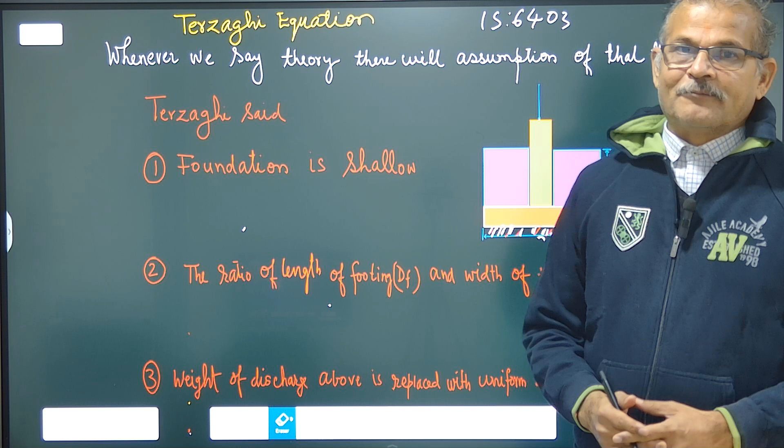Determination of safe bearing capacity based upon the Prandtl theory. So Terzaghi assumed that depth of footing

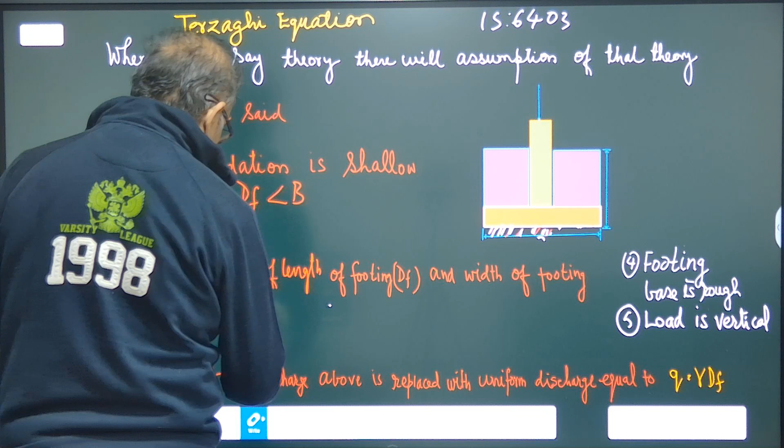is less than width of footing. He also assumed that length to width of footing ratio is greater than 5. Load transfer from the structure is vertical.

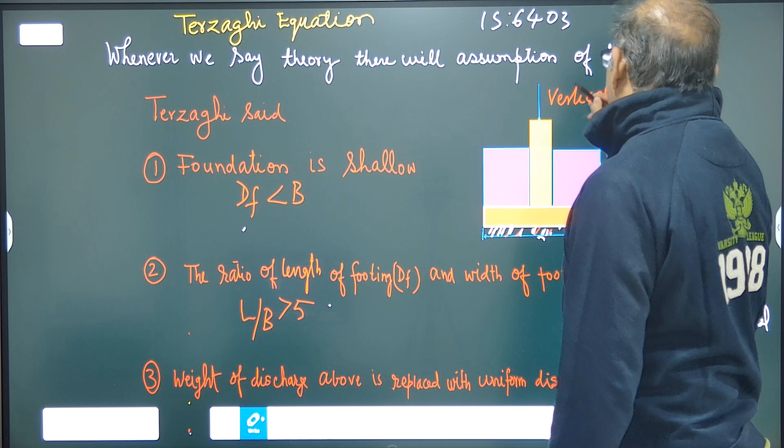So load coming from the structure is vertical, and base of footing is rough. In case of failure, it follows the general shear failure.

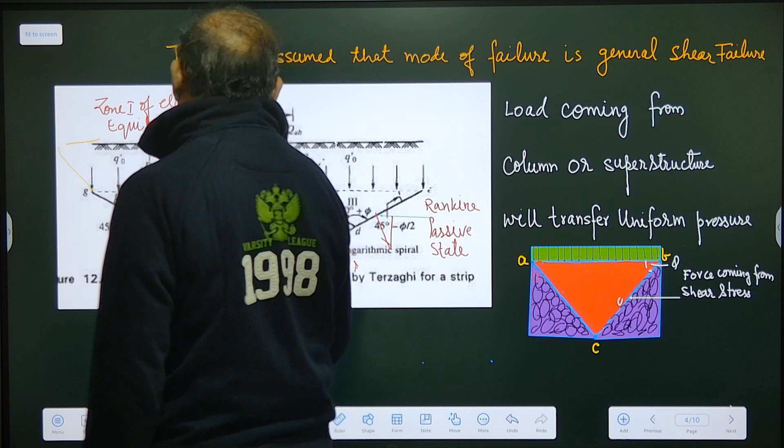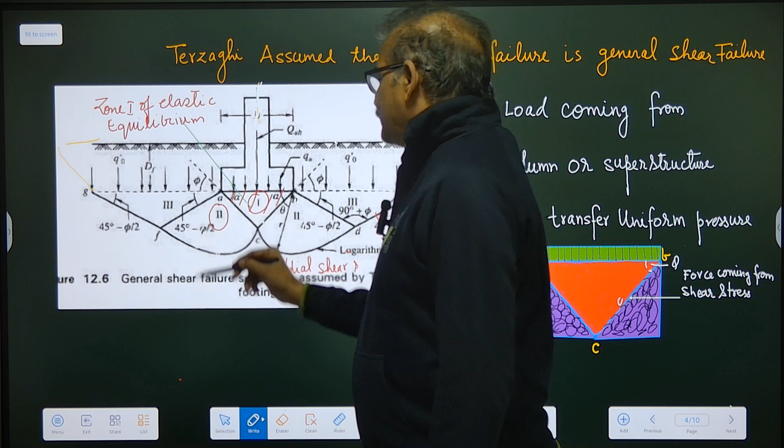There will be 5 zones. First zone will be the zone of elastic equilibrium. It will sink along with the footing, and zone 2 on either side will be radial shear failure zone,

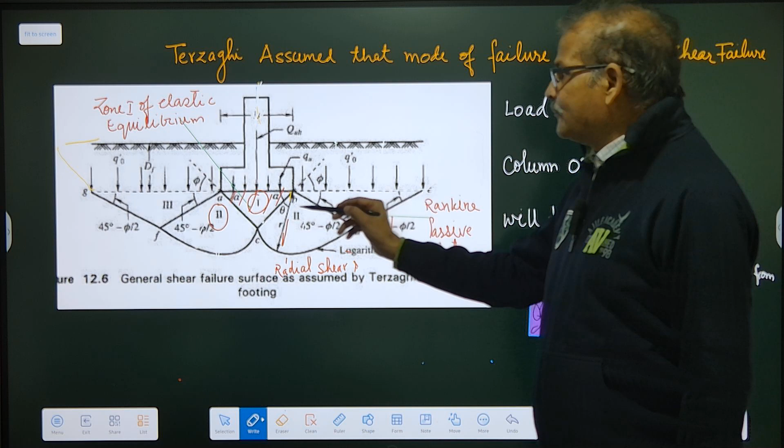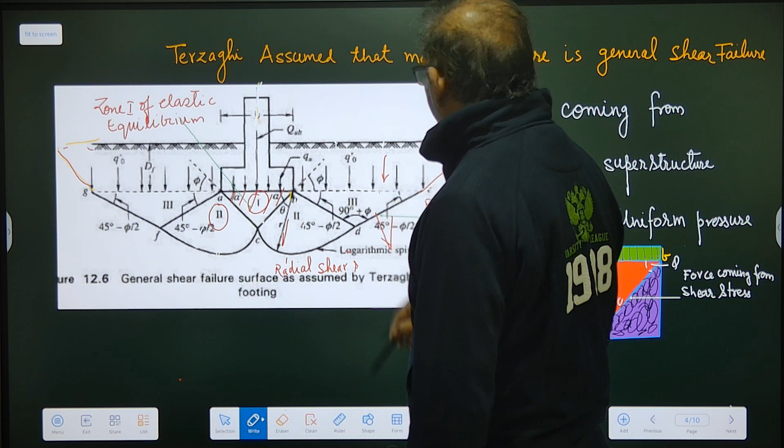which will have logarithmic spiral of radius r from the corner of the footing, and third will be the Rankine passive zone. This failure will not extend to the surface, and the shear strength of soil above this horizontal surface has not been considered for the analysis of safe bearing capacity by Terzaghi.

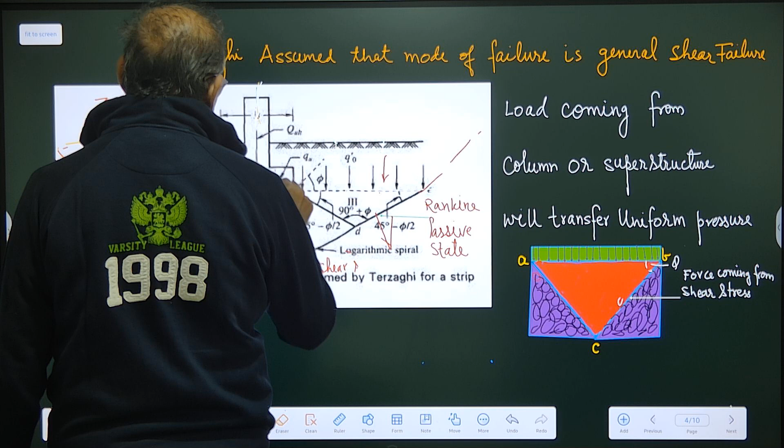And the load coming from the structure will be uniform. It will be uniformly distributed over this horizontal surface. These are all the assumptions he has made while deriving his theory.

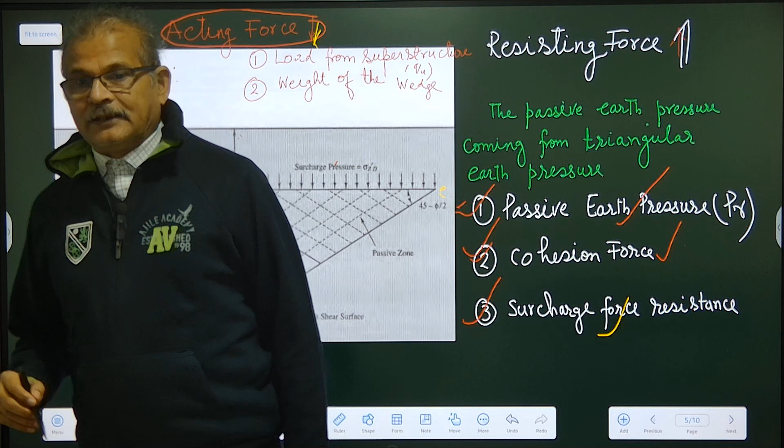There will be two forces acting downward responsible for the sinking of the footing, and there will be four forces acting upward responsible for holding or preventing the falling of this footing.

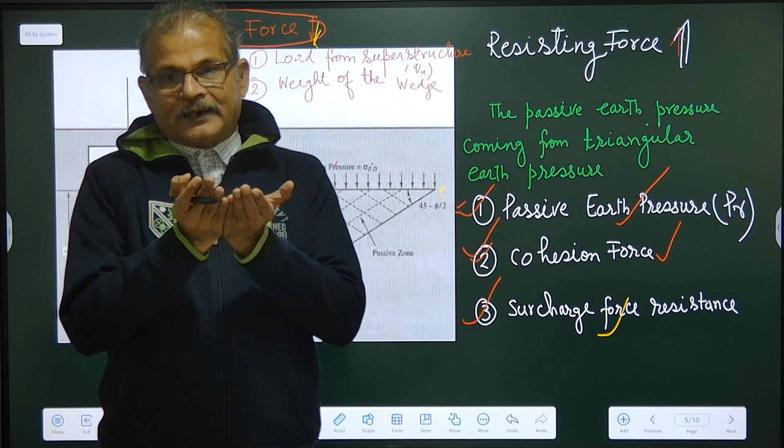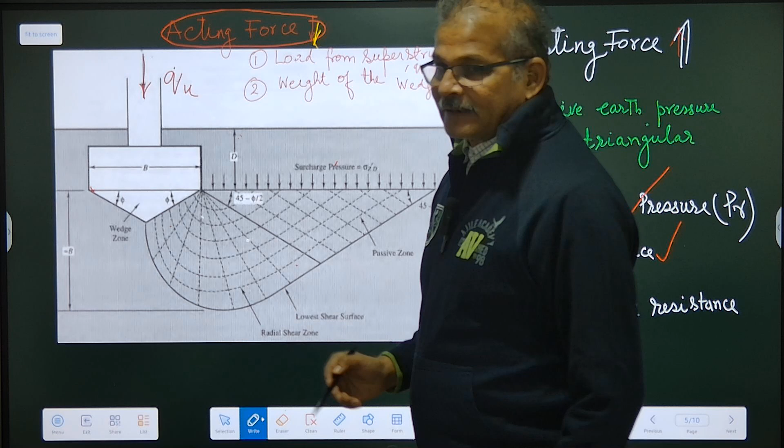So this is the two force: the load coming from the structure, that is QU, at the state of equilibrium. It will be in the plastic equilibrium. This soil will be in the plastic equilibrium, and weight of this wedge.

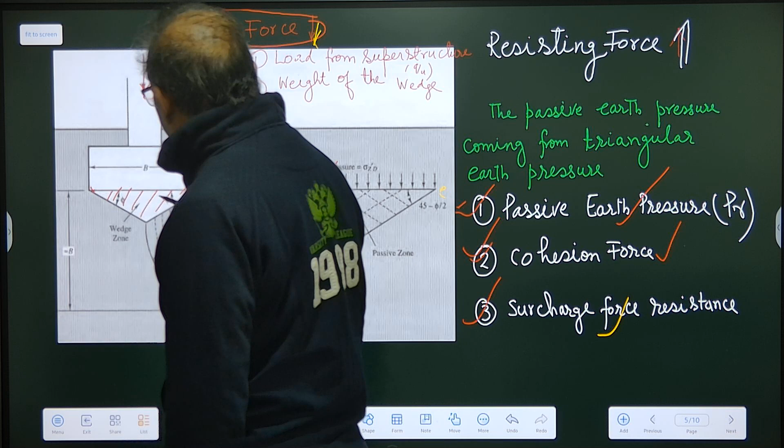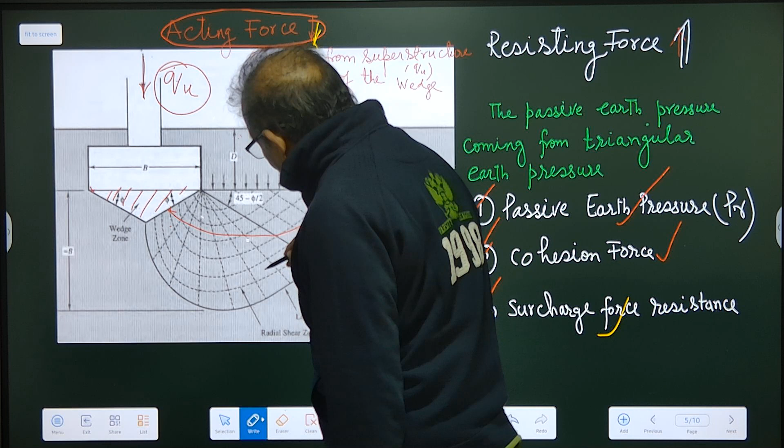Load coming from the superstructure and weight of the wedge will be responsible for sinking the footing, and the passive pressure from the soil, because once it sinks, it will have passive pressure over the soil.

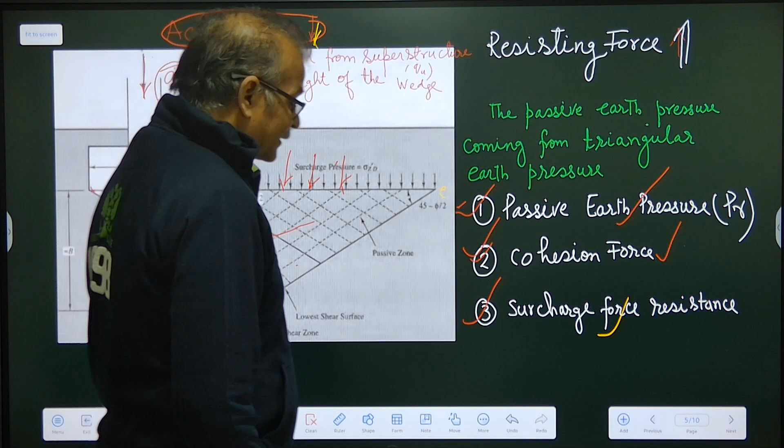So passive pressure from the soil, cohesion force, and surcharge weight will all be responsible for holding the footing in equilibrium state, and the shear force acting over this plane face will also be responsible.

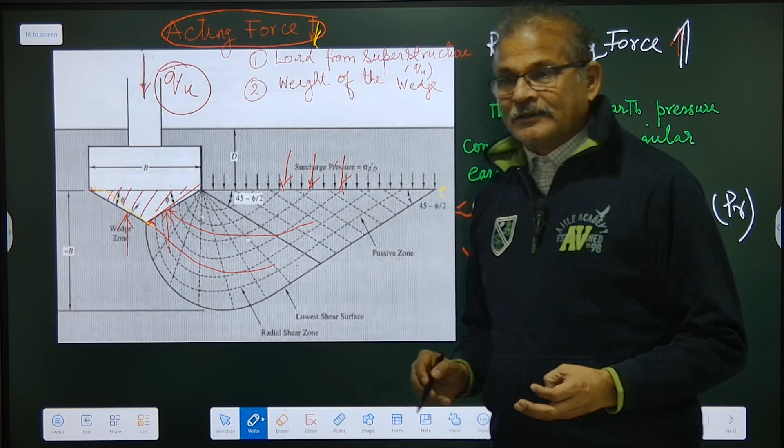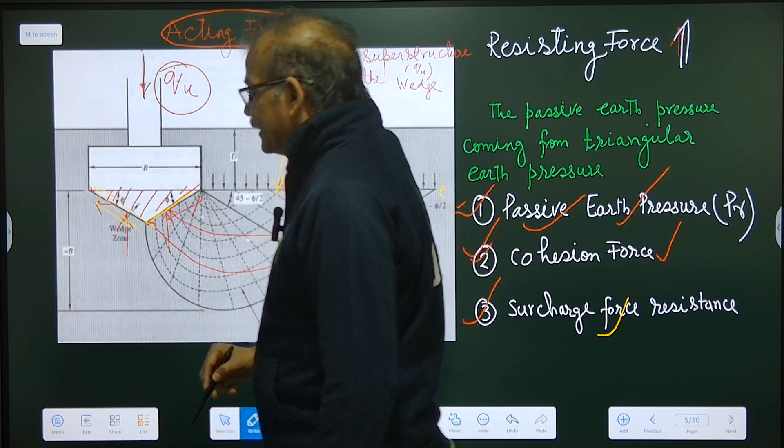So lateral earth force, this is passive earth pressure from the soil, cohesion force, surcharge force, and the shear force acting at this face due to C and phi will all be responsible for holding the footing in equilibrium state.

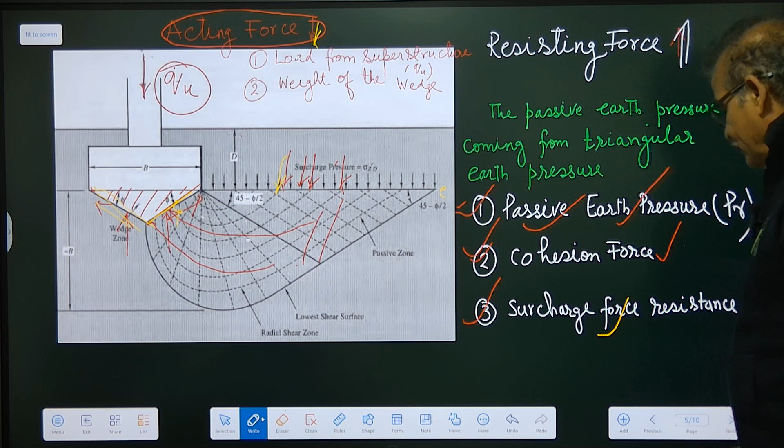As for the earth pressure, it will have passive behavior, so it follows the Rankine earth pressure theory. In Rankine earth pressure theory, it is explained that whenever this retaining wall face is moving inside, there will be pressure from the earth onto the retaining wall.

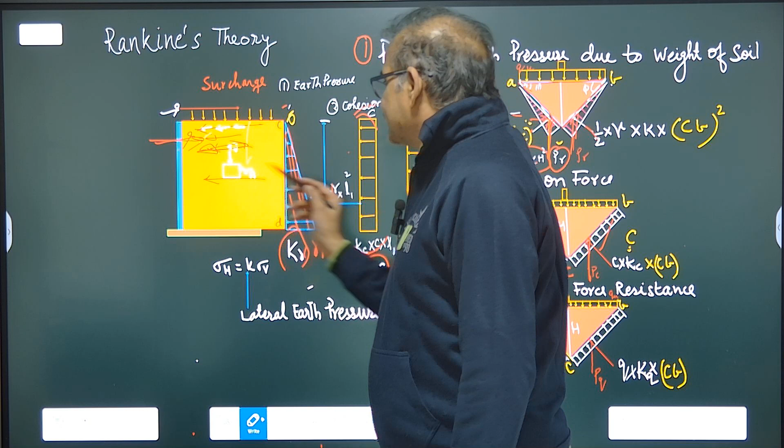So there will be three pressures. One will be due to earth, another will be due to cohesion, and third will be due to surcharge.

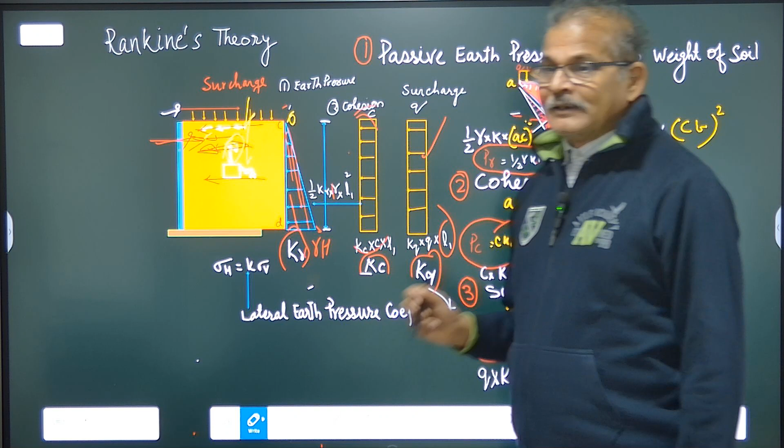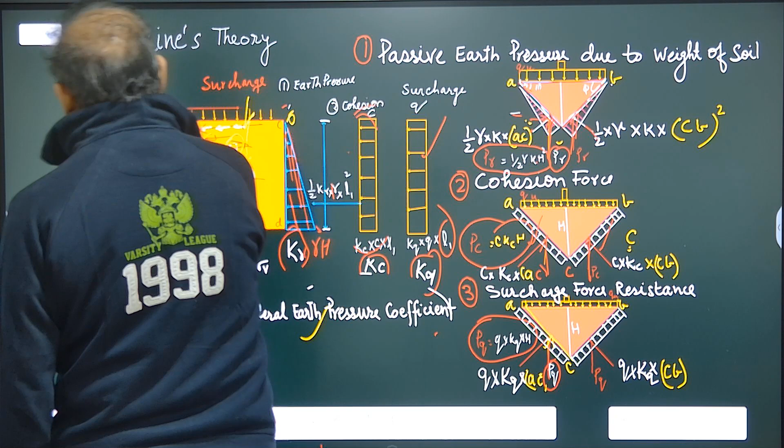This will have whatever vertical component is there; the lateral earth pressure will be multiplied by the respective coefficients, the lateral earth pressure coefficients. So for the earth pressure, it will be K gamma. For cohesion, it will be Kc, and for the surcharge, it will be Kq.

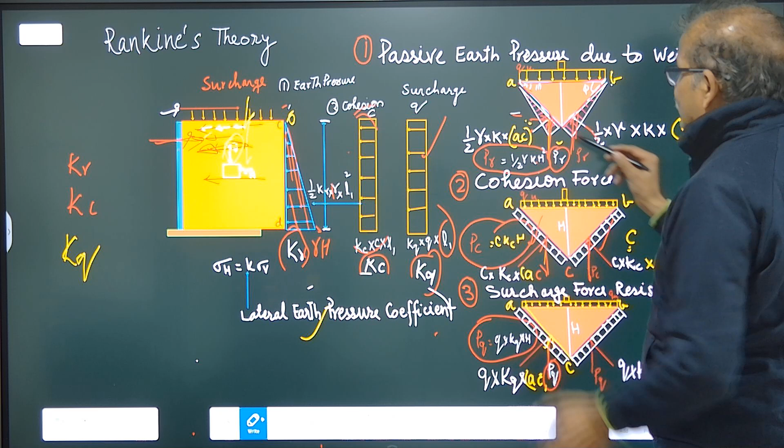So now this wedge will act as a retaining wall. So we will have the normal pressure acting at this face. We are interested to have the vertical component of it, so we resolve it and find out the vertical component.

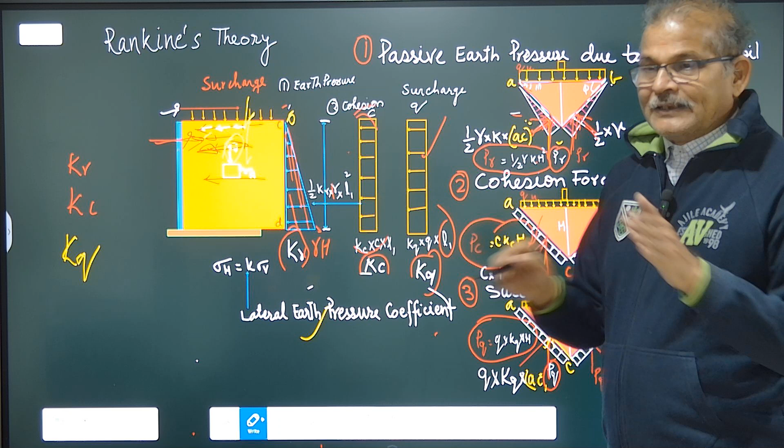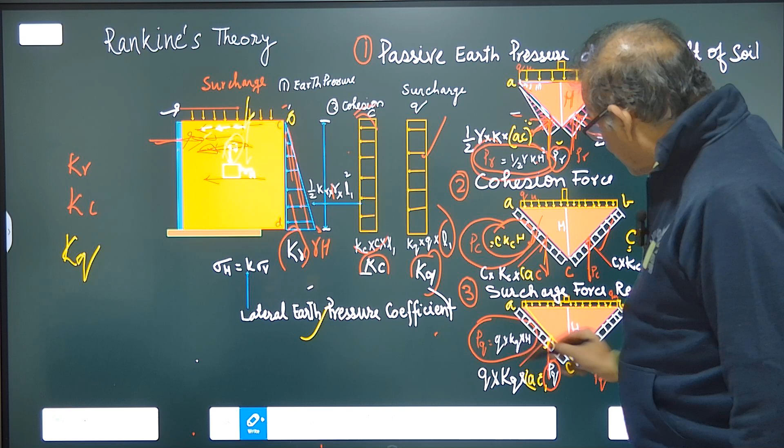In this case, if H is the vertical component, then P gamma will be half gamma K into H square. In case of cohesion, it will be PC equal to C Kc H, and in case of surcharge weight, it will be Q into Kq into H.

This we will use in determining the ultimate bearing capacity of the soil.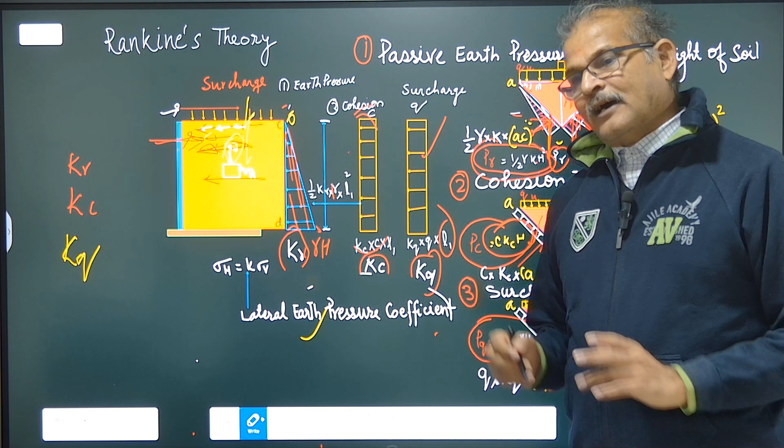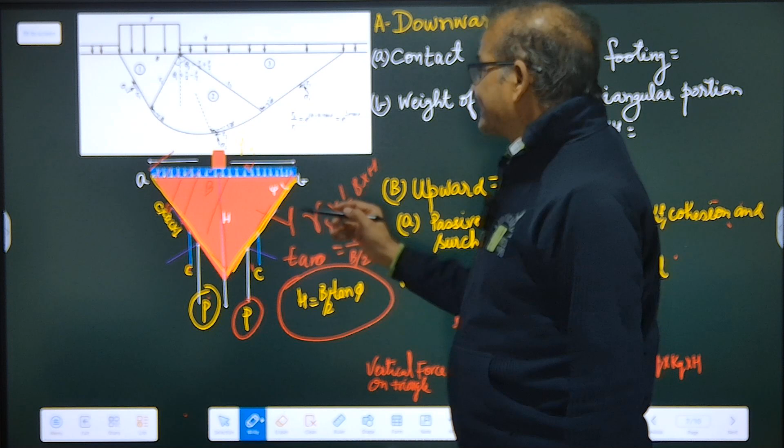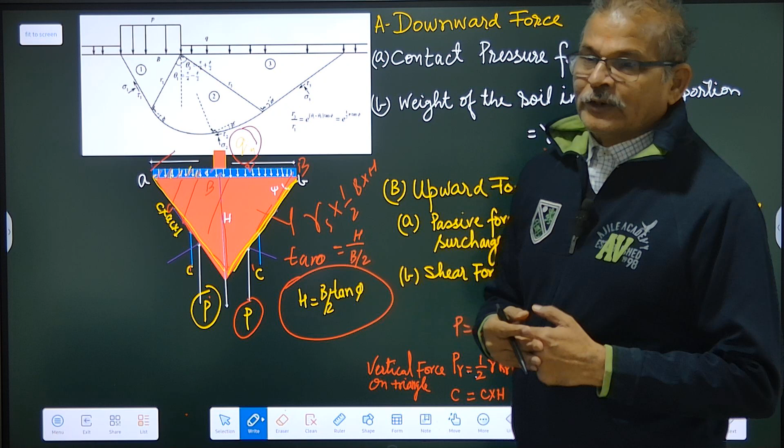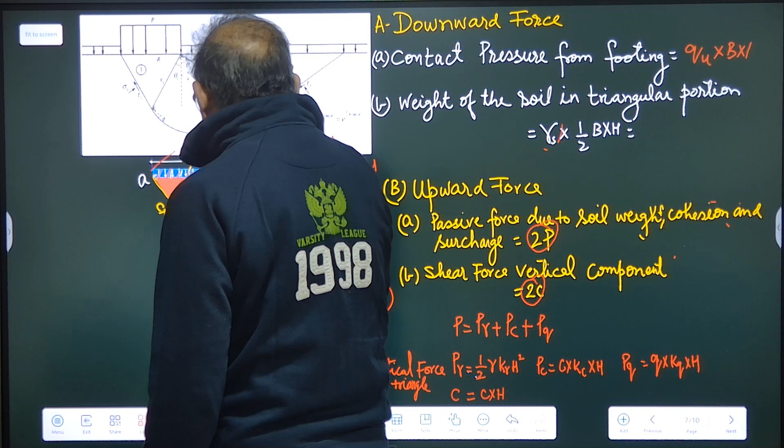There will be two forces coming from the downward direction: the contact pressure of the footing over the soil, and the weight of the sinking wedge. If Qu is the force coming from the top, with width B and unit length, the area will be B into 1 into Qu. So contact pressure from footing will be Qu into B into 1, and the weight of the wedge, which will be sinking along with the footing, its area will be unit weight of soil into half into width multiplied by height of the wedge, so half into B into H.

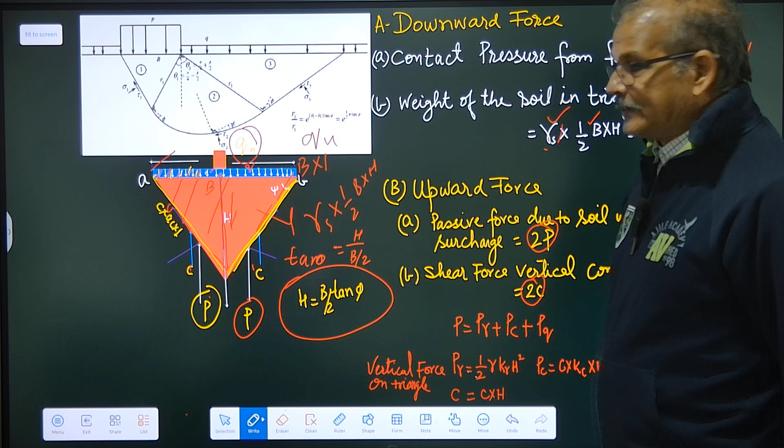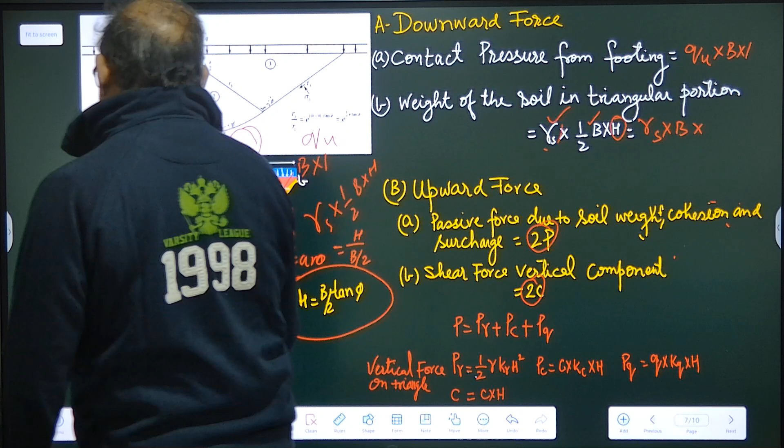Now this H we need to convert in terms of footing width. So it will be gamma into B into H. We know tan phi, where this is the phi angle. Tan phi will be H over B by 2, and we can say this H will be B by 2 tan phi.

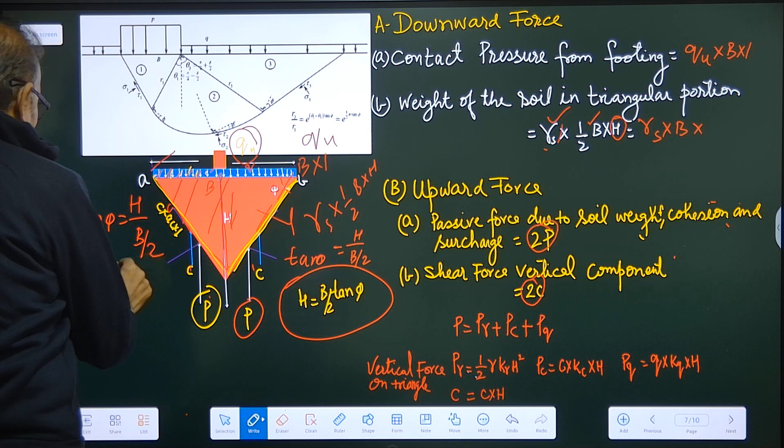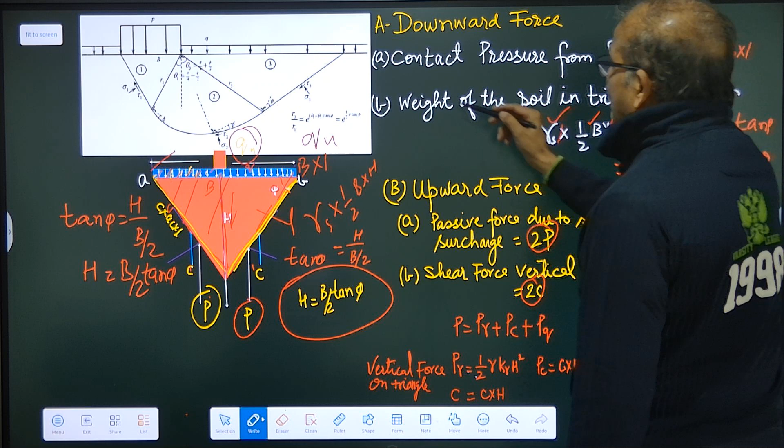Replacing H by B by 2 into tan phi, and rearranging, we get 1 by 4 gamma unit weight of soil into B square into tan phi. So these two forces, A and B, will be responsible for sinking the footing, and there will be four more forces.

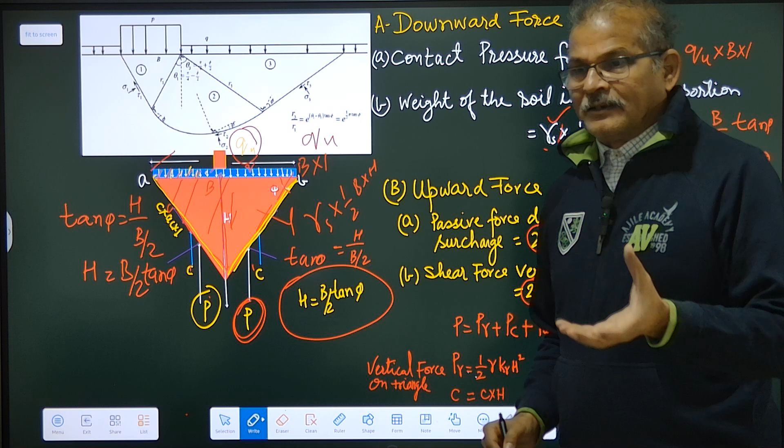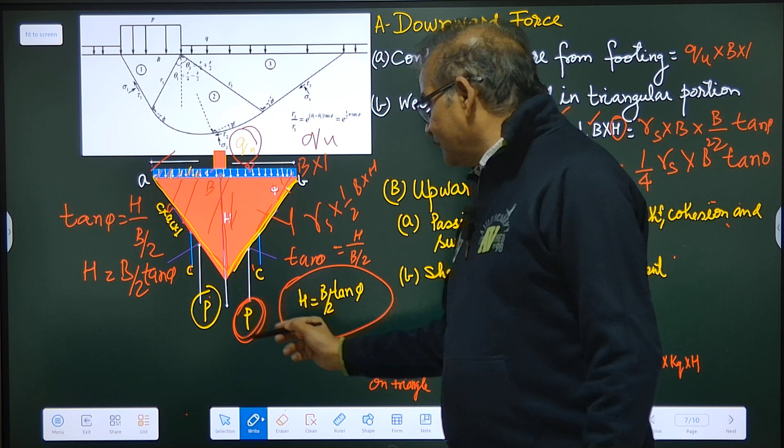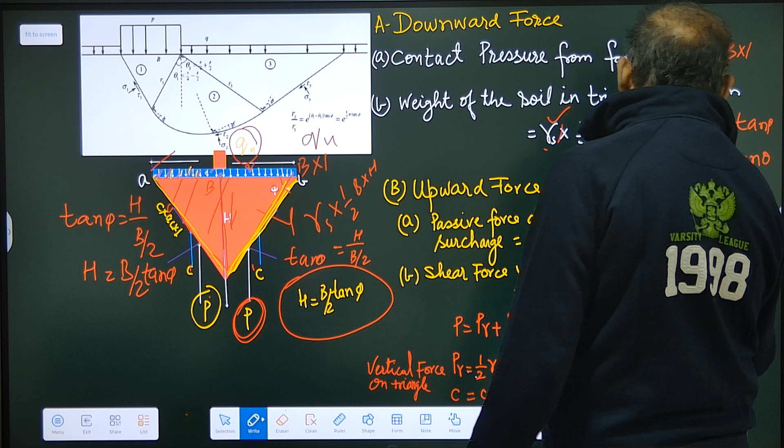So 2P and 2C. This 2P is nothing but earth pressure P gamma, PC and PQ, and this is a cohesion force at both faces of this triangular portion, this wedge.

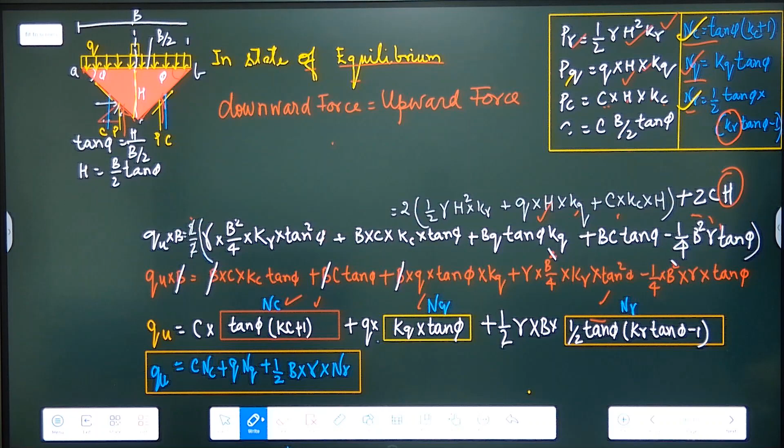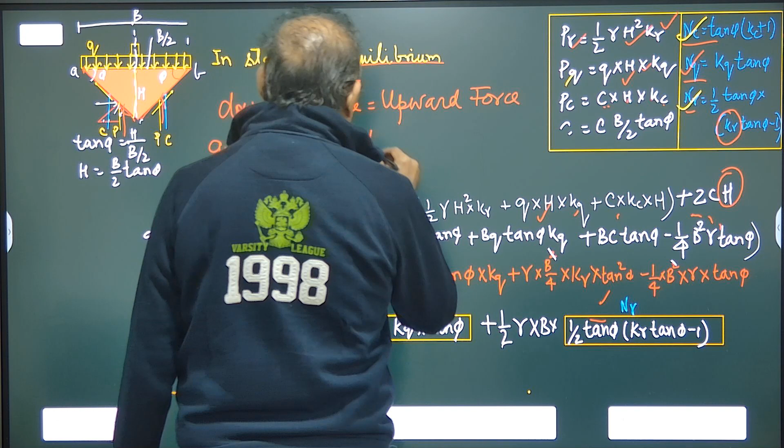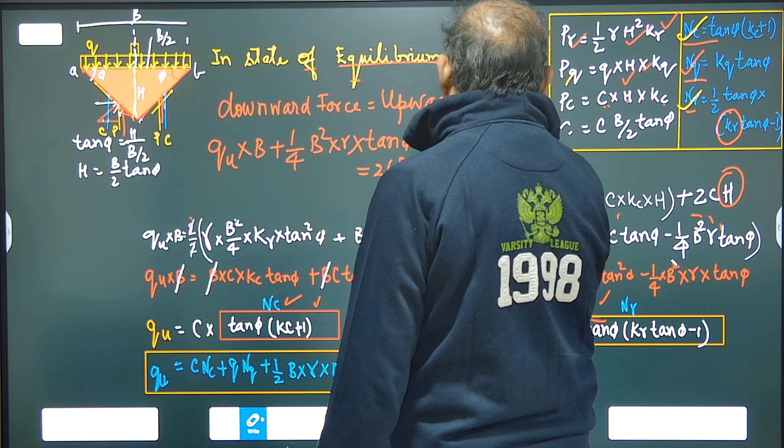Now we determine the downward force. Downward force is Qu into B plus 1 by 4 B square into unit weight of soil into tan phi. And the upward force is 2 times pressure: earth pressure P gamma, plus due to cohesion force PC, due to surcharge PQ, plus due to shear force 2 into C.

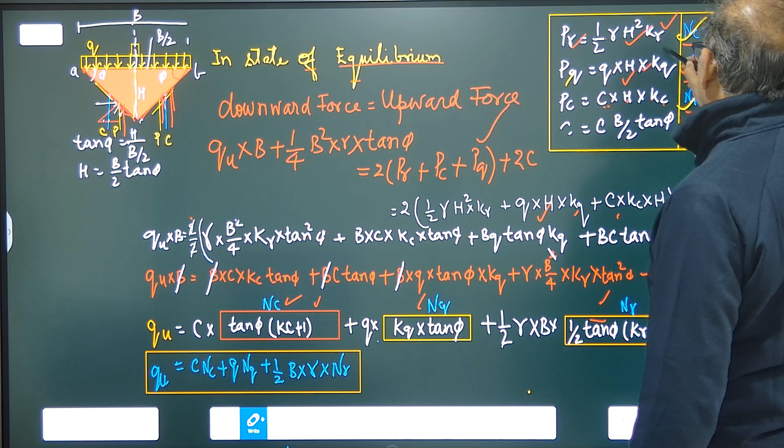Now we know P gamma is the vertical component acting to hold the wedge, it will be half gamma H square K gamma. PQ will be Q into H into KQ, and PC will be C into H into KC, and this shear force will be C into B by 2 tan phi.

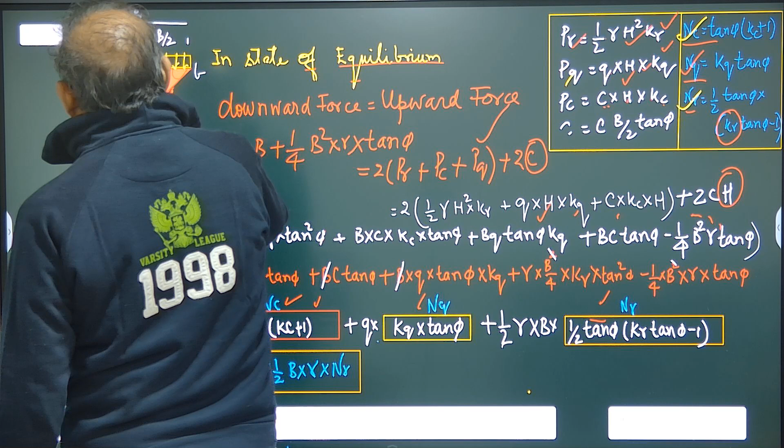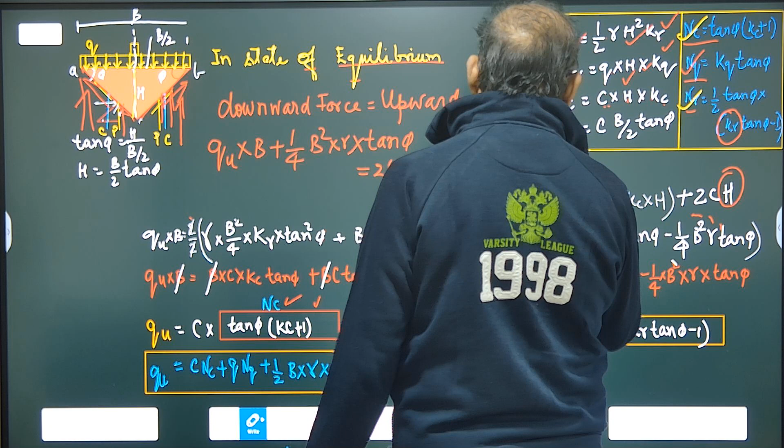Because this is acting like this, we also need the vertical component, which will be C into B by 2 tan phi, so 2C into B by 2 tan phi.

Now we input all this: half into gamma H square into K gamma, Q into H into KQ, C into KC into H, 2C, and H we have replaced by B by 2 tan phi.

Now all this we need to arrange to find out NC, NQ, and N gamma. NC is given by tan phi, then lateral earth pressure coefficient for the cohesion, plus 1. NQ is lateral earth pressure for the surcharge into tan phi. And N gamma is half tan phi into the lateral earth pressure coefficient for the self-weight into tan phi minus 1.

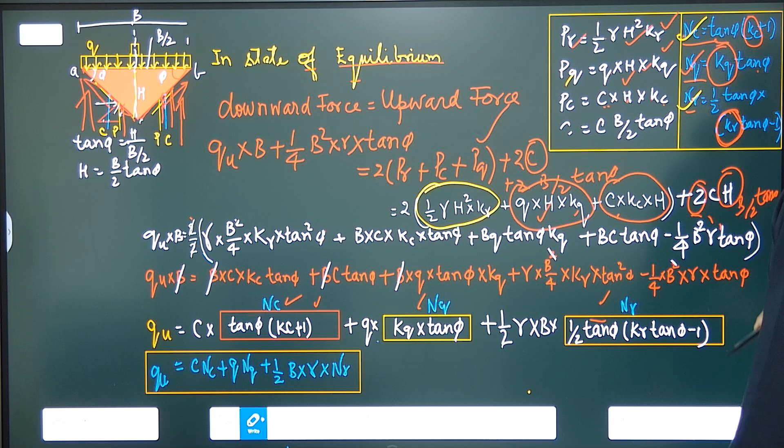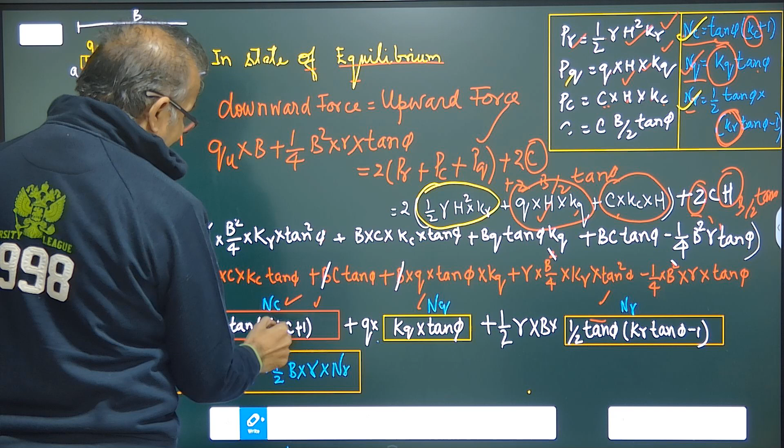All this we need to rearrange as shown here, and we can find out Qu is equal to C into tan phi KC plus 1, Q KQ tan phi NQ, half gamma B half tan phi K gamma tan phi minus 1.

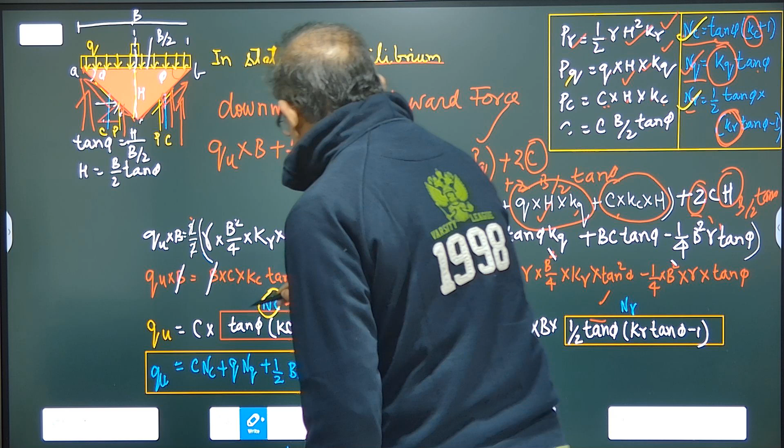This term is NC as we find out from here. KQ tan phi is NQ, and half tan phi K gamma tan phi minus 1 is N gamma.

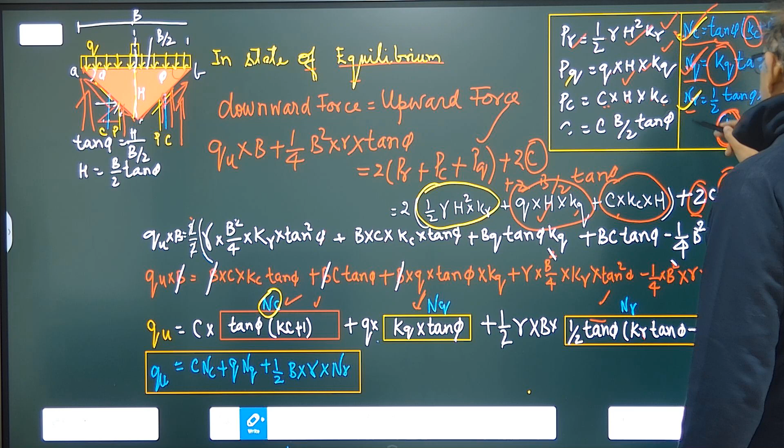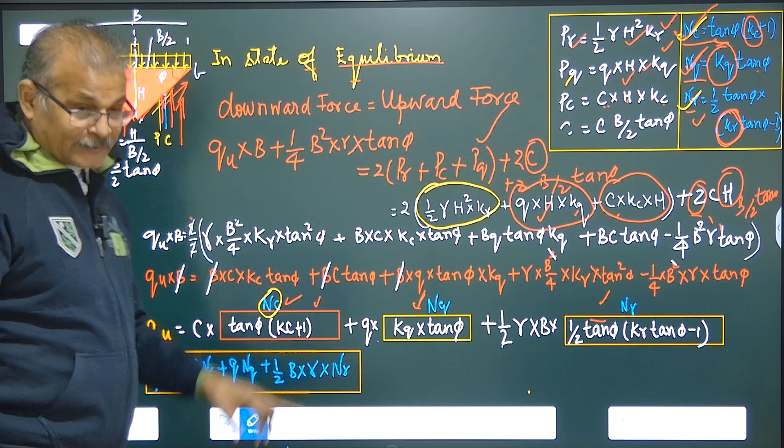Input this NC, NQ, N gamma, we find out the ultimate bearing capacity of the foundation: C NC plus Q NQ plus half gamma B N gamma. In terms of net ultimate bearing capacity, we have to subtract gamma into D, so this will become NQ minus 1.

So with this we completed how to find out the ultimate bearing capacity of soil as per Terzaghi. This is also given in IS 6403.